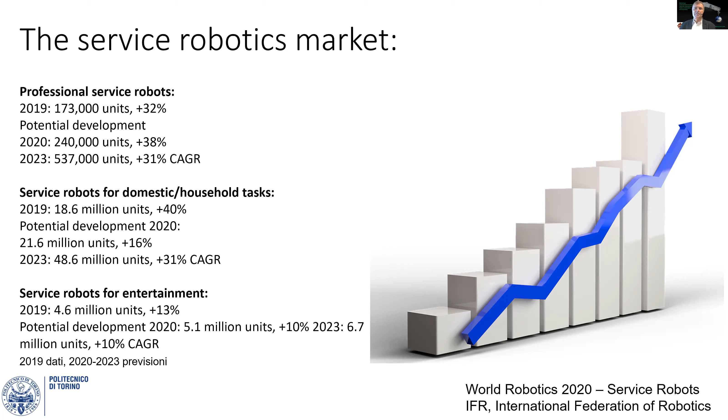The continuous yearly growth that is forecast is around 30%, which is impressive. Where are the professional service robots used? Mainly in logistics and inspection. Those are very important areas that are growing according to the International Federation of Robotics.

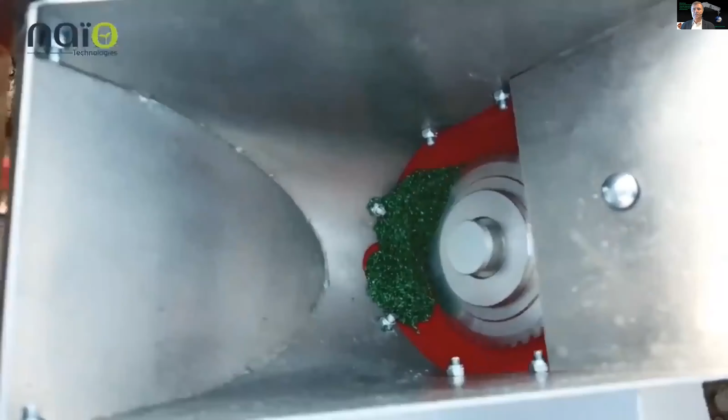But they are also devoted to weeding and hoeing. This small video gives some idea about this small size. Here you can see seeding and then hoeing. Those are the most important activities.

Moving to medium size, we have tools and robots that can move in a farm. They are designed for multiple implements, multi-purpose. For example, the steer tractor has hybrid motorization in order to work 24 hours a day. They are connected in order to be very accurate in positioning, and they must be safe. This solution works in tree crops, market gardening, or viticulture, both with narrow rows or wide rows.

Again, a few seconds of images to have a look at what happens in the field. So the last part of my categories is related to big size.

What I want to underscore is that now we are mainly at a concept stage, so there are no products available in the market, but many big companies are working on solutions that will make autonomous also big size robots devoted to operations that require high power, such as plowing, harrowing, weeding. They have to be compatible with traditional agricultural machinery implements.

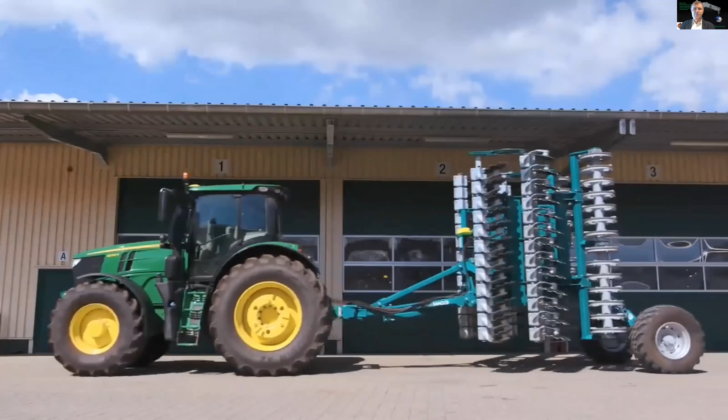To give an idea, again a small video: this is a very interesting solution that substitutes the wheels with tracks, so it is very compact, highly maneuverable, and also the power available is very high. So it is a challenge to have a product like this.

Now I want to move to a research prototype, and show our research on a mobile robot devoted to precision agriculture. Precision agriculture is a crop management technique that employs tools and technologies to increase the climatic and environmental sustainability of agriculture and to increase efficiency and quality.

The rover you are looking at in the image is devoted to mapping, monitoring, and cooperation with drones. I will give you some detail, but I also want to underscore the project requirements related to vineyard activity.

The vineyard has a specific geometry, so the height of the foliage is between 0.5 and 2.5, and the distance is between 1.5 and 2. We also have, for example, hill landscapes and slopes that are very strong.

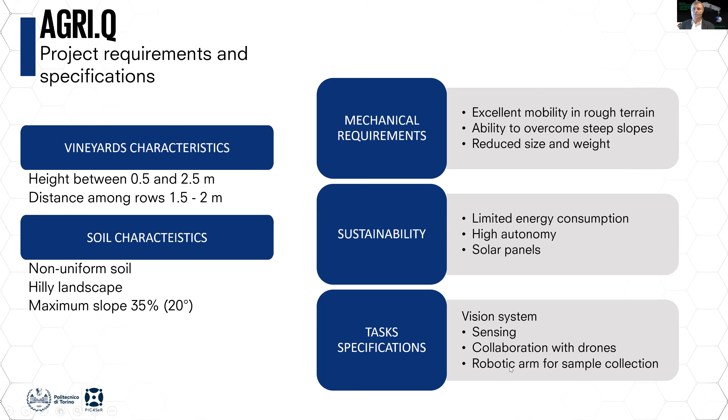This is the system. It is better to see it when it is working. Again, we chose to have a photovoltaic surface on top, but the challenge is to move on ground that is very complex in geometry.

We chose an 8-wheel driven solution that is something in the middle between track and wheel, because the contact surface is very wide, but at the same time we have the efficiency of wheel locomotion.

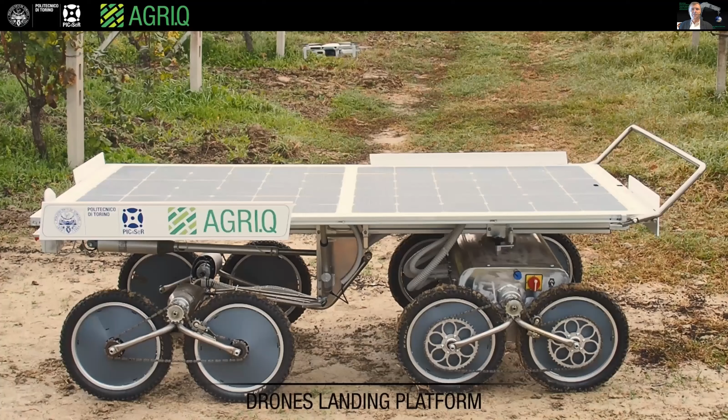The top platform can be used for landing drones, and we also have a collaborative robotic arm installed on the platform. We can have a wider workspace, considering also the workspace of the mobile platform.

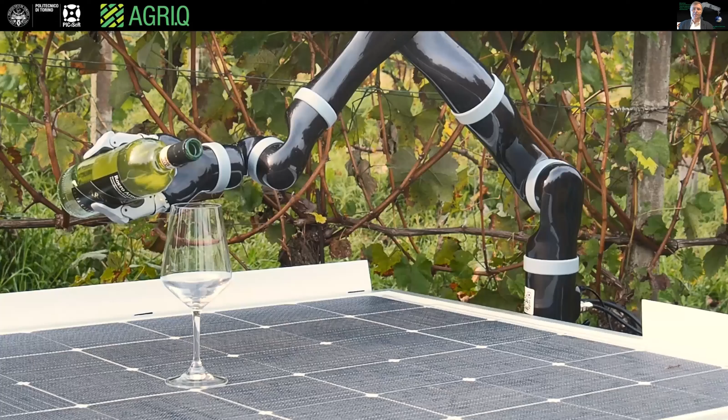So this is shortly our solution, and cheers for the results—have some wine. Okay, a few seconds more, I will skip some detail.

You can have a look at the passive degree of freedom used for steering, because we have differential steering thanks to the speed control of the front locomotion unit. There is a passive degree of freedom for compensation of the unevenness between the front and rear module.

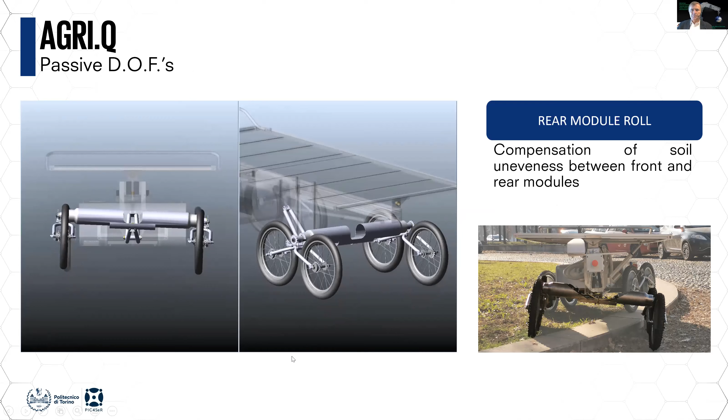This is one of the most interesting characteristics of our mobile robot: it is able to climb obstacles with a dimension close to the radius of the wheel. That is impossible with only one wheel, but this wheel-rocker rotation enables good load distribution on the soil and also climbing ability.

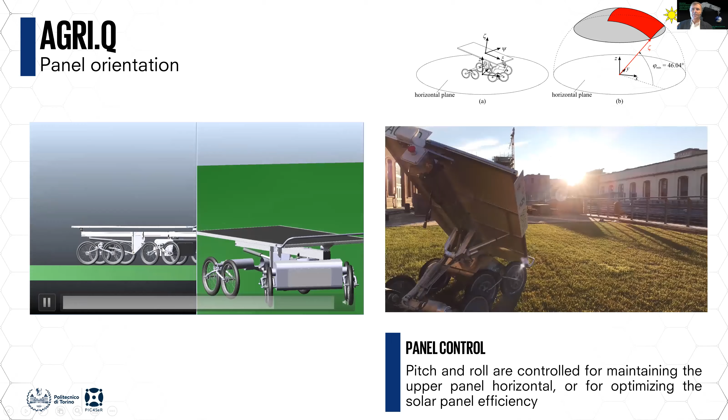Relating to panel control, we have two orientations that can be controlled, both for levelling and for following the trajectory of the sun in order to have a better photovoltaic effect.

I'm sorry, I have to close here, and thanks for your attention. Thank you very much.

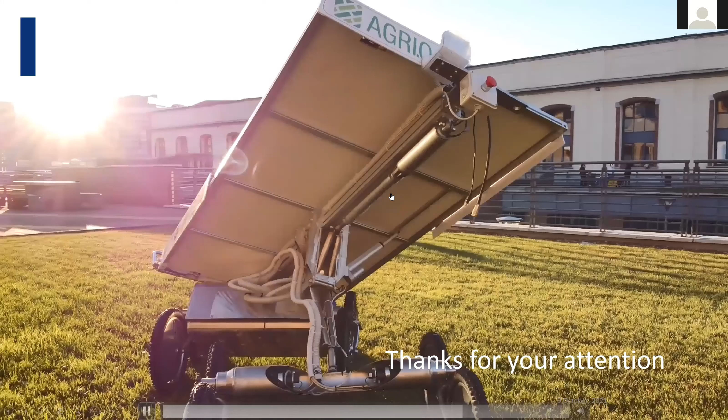There is a question from here in Rome. Okay, please go ahead. Can you hear it? Sorry... No. Okay, I can try to repeat it.

The question was: how can a company use these robots? Are these robots that can be used by a single partner, like a small farm, or does it require a big company? So they are asking if this kind of robot can be used by single farmers on a low scale, or if they are more for big companies that can afford them.

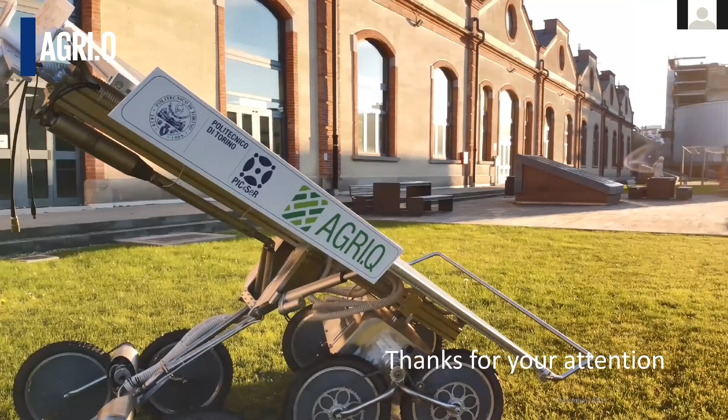No, especially this solution was designed in order to be a low-cost solution. What I mean is that we reduce as much as possible the number of actuation systems. For example, we have an 8-wheel tracked robot, but only 4 motors for traction, 2 motors for orientation of the panel, and in total we have a mass of less than 100 kilos.

That means a simple solution, and obviously now we are at the prototype stage, but we believe this solution can be realized as a product with limited cost. Finally, it is interesting to have this type of application for relatively small farmers who want to control their production.

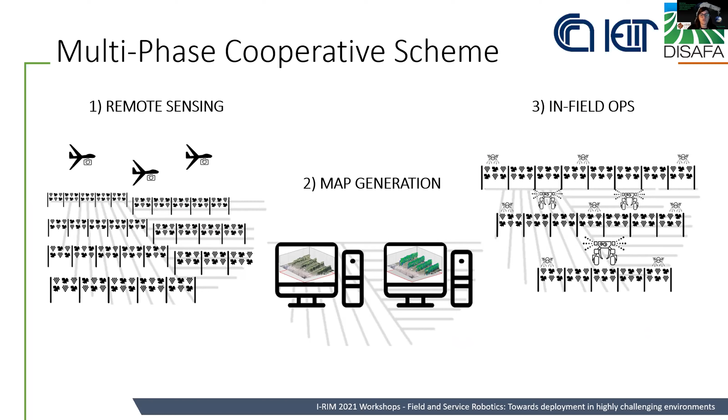These maps still maintain the shape of the crops, providing light maps that can later be used for the autonomous guidance and navigation of both ground and aerial vehicles for in-field operation, in particular spraying of biopesticide within vine rows over slope terrains.

This mission scenario is placed within the PRIN project entitled 'New Technical and Operative Solutions for the Use of Drones in Agriculture 4.0', whose goal is to design new tools and implements for in-field operations performed by unmanned autonomous vehicles. The consortium includes other universities from different parts of Italy.

About the main actors: in this operative scenario, we are considering a mini fixed-wing UAV for the remote sensing mission phase, a 4-wheel steering electric UGV developed by Professor Gay's group for the in-field operation, and the Q4T quadrotor developed by MAVTech Company for the spraying operation among the vine rows. We selected the Nebbiolo vineyard in Serralunga d'Alba, which has an extension of 2.5 hectares and an elevation ranging between 330 and 420 meters.

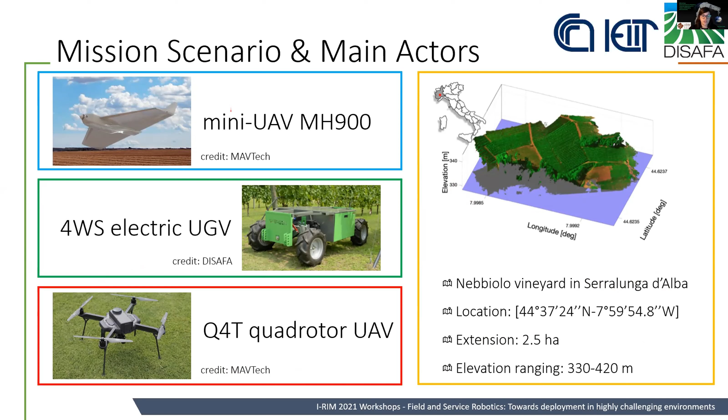Going into detail of the multi-phase approach: the first phase is the use of a fleet, or a single unit depending on the extension of the area, of a fixed-wing UAV that overflies the selected vineyards in order to collect aerial imagery for reconstructing maps of the area.

In this case, we developed a guidance and control algorithm to guarantee proper autonomous navigation and guidance of these drones. In particular, we use waypoint-based and terrain-following guidance to define the optimal path, and we ensure robustness to wind gusts using the so-called tube-based robust model predictive control to track the optimal trajectory.

Once all the aerial images have been collected, we developed, in collaboration with the Department of Agricultural Sciences, an algorithm that allows us to automate the elaboration of those images into georeferenced maps, though these maps are simplified.

To do so, we first perform a semantic interpretation of the point cloud in order to identify the different elements of the scenario, such as the canopies and the terrain. Then we adopt a combination of convex hull filtration and minimum surface area design in order to generate a light 3D mesh model of the crop, as shown in these pictures, which can later be used for guidance and navigation of the in-field drones.

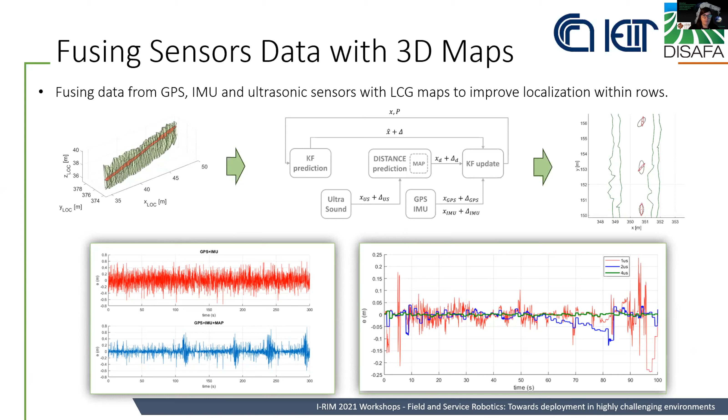Another way to use those maps has been to automatically define, using an unsupervised method, the so-called occupancy grid map, in order to identify the obstacles - in this case static obstacles represented by the vine rows - as well as the turning area, which defines the requirements and the constraints for planning the in-field operations of both ground and aerial vehicles.

These maps are later used for the design of the ad hoc guidance strategies for the UGV and the quadrotor. For the in-field operation, we consider as the ground vehicle a four-wheel steering UGV. For the guidance and control strategies, we use the classical approach based on a global path planner, which in this case is based on an RRT-star approach that provides us all the main waypoints along the field.

Then we have the local path planner based on a dynamic window approach that provides us the feasible optimal trajectory, enforcing the non-holonomic constraints of the vehicle. Once we obtain offline the desired trajectory, we have for the UGV a cascade control strategy based on a proportional steering controller, which is proportional in terms of the distance and orientation relative to the attitude of the vehicle, and has non-linear features with respect to steering angles of the front and rear wheels.

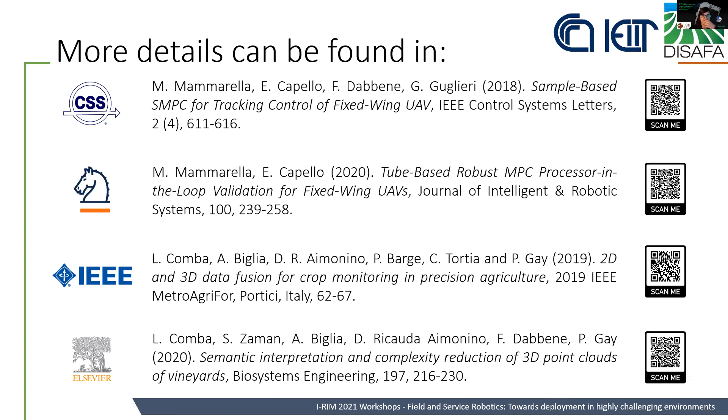More details about the work that I described to you this morning can be found in the publications reported in these slides. And from my side, that's all. Thank you for your attention, and if you have any questions, I'm glad to reply.

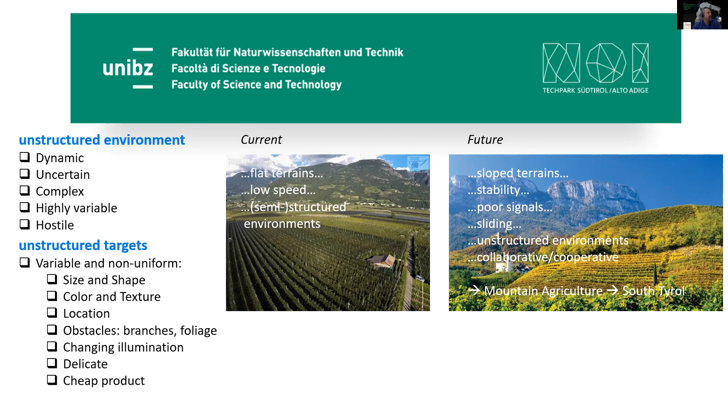The lab's main mission is to be a link between applied research in mechatronics and industrial automation with agroforestry. I'll move on to the sorts of systems we're working with now.

At the moment we effectively have 3 main ground vehicles that we use. We use a Husky unmanned ground vehicle, a 4-wheel system, outfitted with a couple of different robotic arms, a UR5 and a UR3. I'll explain a couple of the projects we're running with this system.

We've also developed a couple of our own systems. One example is a 1 meter long remote control scale model that we've instrumented with sensors such as RTK GPS, inertial measurement units, and things like this, to build our own vehicle for initial testing in this environment.

We also have a tracked vehicle called the Matrobach, made in Austria, with a payload of about 500 kilograms, and it's actually quite fast. We've also just started experimenting with legged robots, especially in environments like this one which are very uneven and steep. There are some advantages to using legged systems, and we've only just started working with this vehicle, so it's new to us.

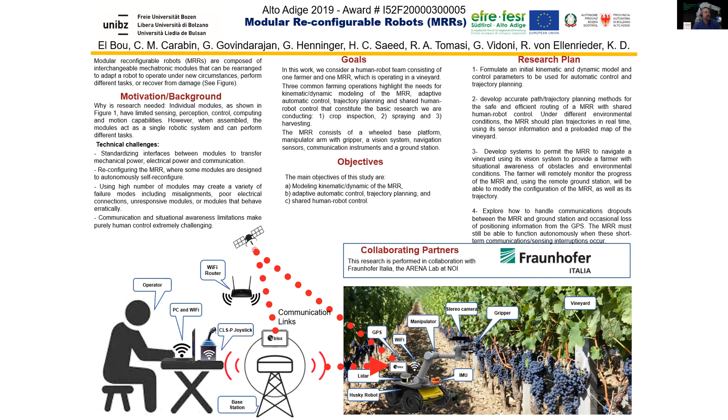This is an example of some recent experiments. These are all indoor experiments because we've only just started this project, but we've been looking at path planning with obstacle avoidance. One of the researchers working with us had been developing path planning methods using boundary node and path enhancement methods, combined with online path optimization for obstacle avoidance.

In these experiments, the vehicle is moving around an environment, which in this case is a simulated vineyard with tapes marking the rows of vines. The idea is that you can put an obstacle in the path of the vehicle. In this case, the obstacle is only seen virtually, so the vehicle doesn't currently have the sensors on it, but it already has the capability to replan the path in real time to avoid the obstacle. You can see the sequence where the robot approaches it, backs up, and goes around the other side.

One of the other things we believe is going to be fairly important for the widespread use of robotics in agricultural applications is semi-automatic control, where you have mixed control input coming from both a human and from the automatic control system itself.

These are some experiments we did with that small dune buggy I mentioned earlier. The vehicle is outfitted with GPS sensors, its own automatic controller, and an RF modem to communicate with a base station, where a user can use a force reflecting joystick to provide input. We're using what's known in robotics as a mixed initiative approach, where the signal from the human and the automatic controller are mixed.

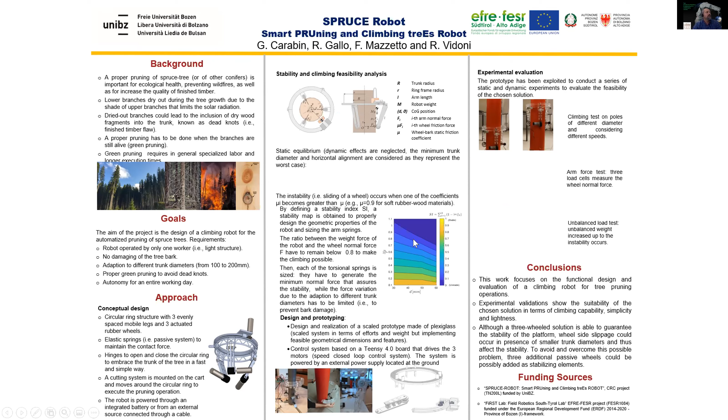Lastly, in mountain regions, monitoring lakes and similar features in remote areas is a bit difficult, but it's also very important from an ecological standpoint.

Here in the mountains, this is often, from an ecological standpoint, a very important measurement. Often people have to do this in remote areas, so making something you can carry on foot and use to make the measurements is something we've been looking at.

So that's it for my talk. I'm happy to answer any questions if anyone has them.

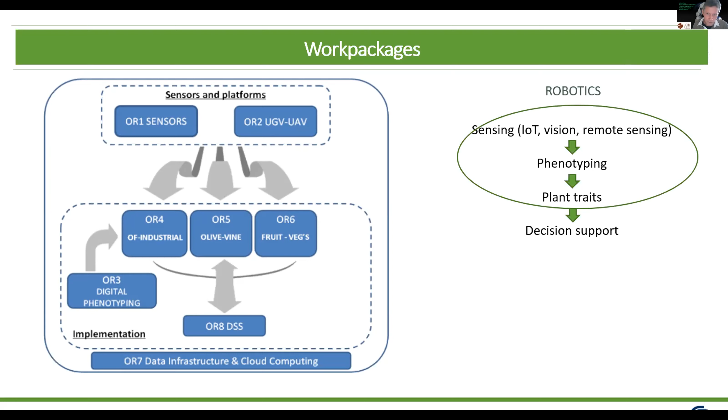We are developing a number of sensors and technologies that go from IoT networks to optical gas sensing and in vivo sensors or computer vision sensors. And then we are developing rovers and drones specifically for the applications of the project.

This is a phenotyping platform, and here is how it works. This is basically a robotics platform, but it's a well-established industrial plant—this is the Italian node of Emphasis, which is a European infrastructure on plant phenotyping. What we do here is create a controlled environment, creating the link between plant phenotypes and digital representations, which can be images or spectral signatures.

In this platform we generate stress conditions on different genotypes, in this case of tomato, where all the plants are individually monitored and moved along, then go into rooms with computer vision cameras. Plus we added hyperspectral cameras, so we can take digital representations of each plant and extract the information we need to derive plant traits—a trait can be a characteristic like yield, leaf area, chlorophyll content, and so on.

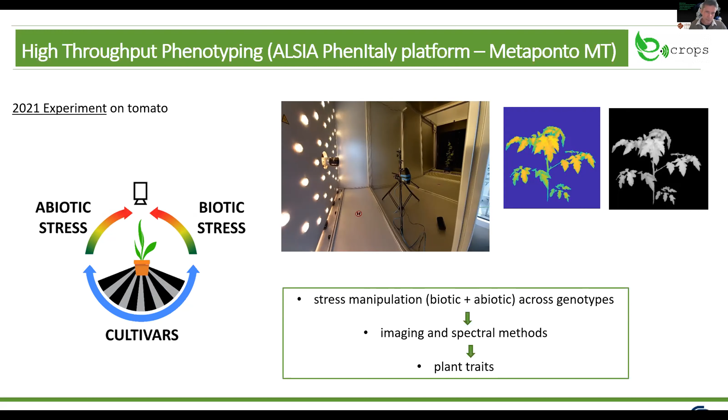Then what we are doing is putting all this into a field environment. In Sardinia, at a Bonifiche Ferraresi farm of about 1,000 hectares, we are organizing an experiment that will happen this year, in the 2022 season, putting a number of plots and replicates, generating stress and different fertilization rates, and monitoring them with ground robots and UAVs, using technologies from computer vision to hyperspectral remote sensing.

We put an effort into hyperspectral technology because many of the participants have this background. So we have hyperspectral cameras on board the drones, and a link with a hyperspectral satellite mission, Prisma, led by the Italian Space Agency, with the aim to upscale. What we learn and develop in the link between plants and remote sensing data, we try to upscale with satellites to a larger scale, fitting a company scale, since not every company can be monitored entirely with robotic platforms or drones.

Then we have other pilots going on, which involve robotics. In this phase, we are developing the protocols, so we sample the plants manually, and on the other hand, the robot platforms are being developed.

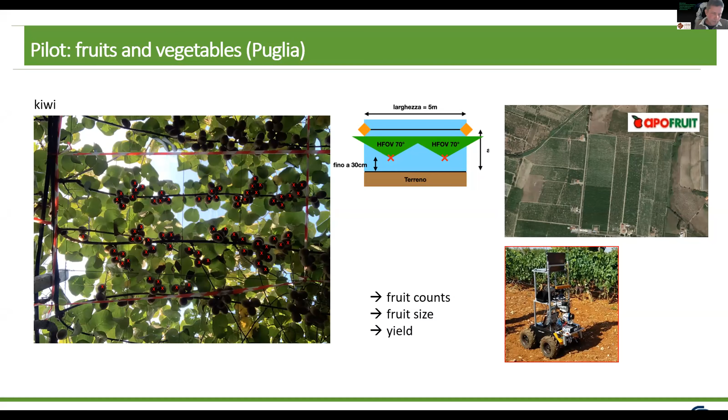So I'm done. The project is in the initial phase, so I don't have final results to report. You can find more information on this website. You can reach me at this email, and we hope to have more results maybe next year.

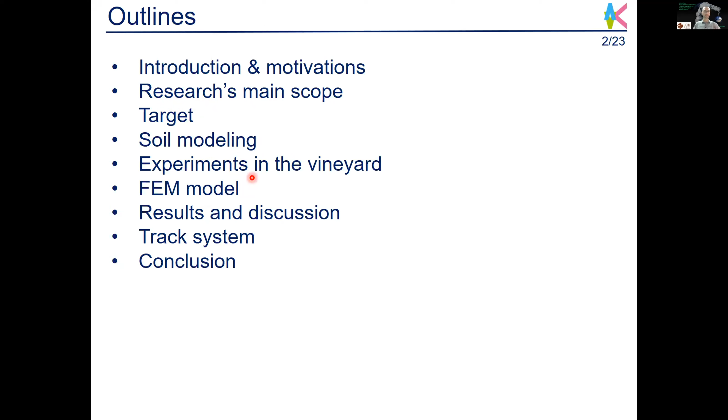Good morning, everyone. I'm Enrico Di Maria from Kyushu Institute of Technology. First of all, I would like to thank the organizers and especially Professor Giulio Reina for the chance to talk here today. My presentation is comparing FEM and experimental data to predict rolling resistance in a grape transporting vehicle. At first, I want to give an introduction and explain the main motivation of the research before going to the real target of this talk, and so talking about soil modeling, experiments in the vineyard, our model, and results and discussion.

Okay, so can you see the title? Yes, yes, oh okay, okay. So as you probably know, Italy is one of the main producers of wine, and in 2019 it was the main producer, so this is an important sector for our agriculture. Usually the traditional way to harvest grapes in a vineyard is that some workers collect the grape and put it in this basket. Then a tractor with a cart enters into the field to collect the grape, and finally he is going to fill the main truck outside the field.

Since the harvesting period is usually August or September, and we have some rain, some heavy rain, it's possible that when we must collect the grape, the field is not in a good condition. So having this tractor entering the field can cause huge damage.

As we know, the soil is a porous medium consisting of particles, and we have two types of damage when the vehicle passes. The first is called soil compaction: when the vehicle passes, these pores are compacted, causing a volume change. This is detrimental for the soil because water cannot infiltrate and roots cannot grow.

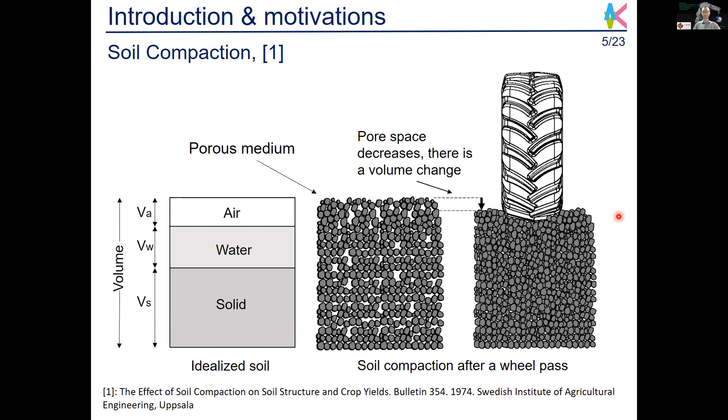The second mechanism of damage is soil distortion. This is especially important for running gears that have a longer contact patch, for example a track system, because the particles are taken from the beginning and then displaced along the whole length. So this is the second mechanism of soil damage.

And so the result is that we can see these ruts in the field, and the farmers must restore the soil quality, and this represents a cost. So the main scope of the research is that we are thinking about developing a system that can adjust the contact area based on the soil condition and also on the payload. It can go from half-tracked mode to a wheeled mode, reducing the area in the second case.

Besides the damage to the soil, this is of course going to change also the performance. Usually on soft soil, the track can perform better, while on hard soil the performance becomes more comparable, especially on frictional soil. But the wheel mode is more efficient - the steering is more efficient if we use steerable wheels.

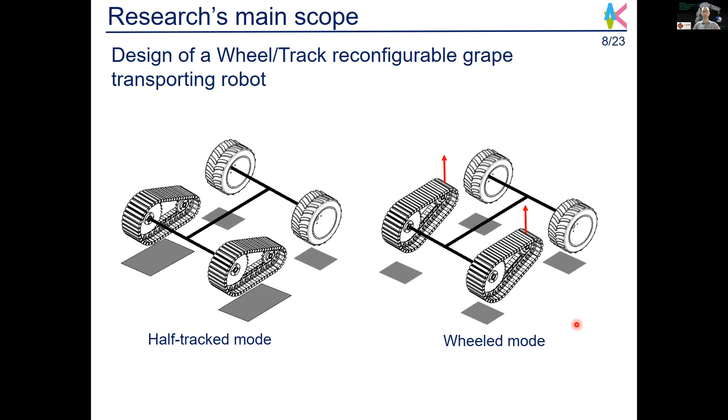And so eventually the final image is that we should have some autonomous cars working alongside with humans in the field. And based, for example, on some soil moisture information, and also the current drawn from the motors, which is roughly proportional to the rolling resistance, the vehicle should decide which locomotion system is best for that condition.

So we go to the target of today. Today what I'm going to do is talk about a FEM model that we developed to analyze rolling resistance and rut formation. This is to support the design of this prototype. I will also show briefly some experiments we carried out in the field to investigate the mechanical soil properties, and finally we will evaluate the impact that different running gear sizes have.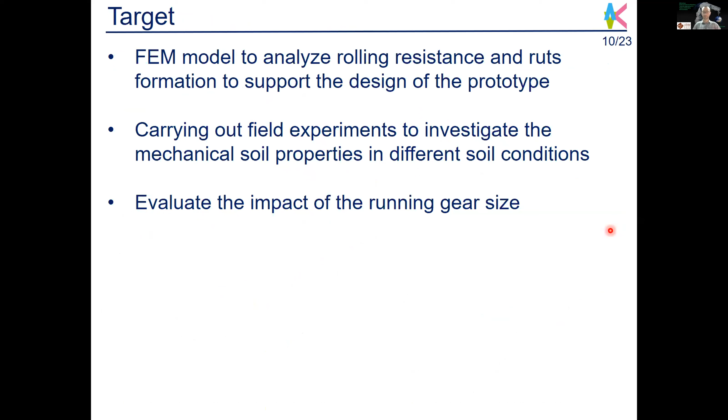I'm going to focus on the wheel type, which is the simpler case. But I want to mention that this analysis belongs to a broader context of experiments that includes also the track. At the end of the presentation, I will say just briefly something about the track as well.

So we consider as targets firm soil, soft soil, and wet soil. To model the soil, we need first to define a yield surface - a boundary between the elastic region and the plastic region, because the soil is an elastoplastic material. The Drucker-Prager model is often used for modeling soil because there is a dependence on the hydrostatic stress.

But we also use the von Mises model, which is this cylinder, and usually von Mises is used for steel. The Drucker-Prager model is apt for firm soil and soft loose soil, where we have volume change, while for wet soil we basically have distortion, so for this we prefer the von Mises model.

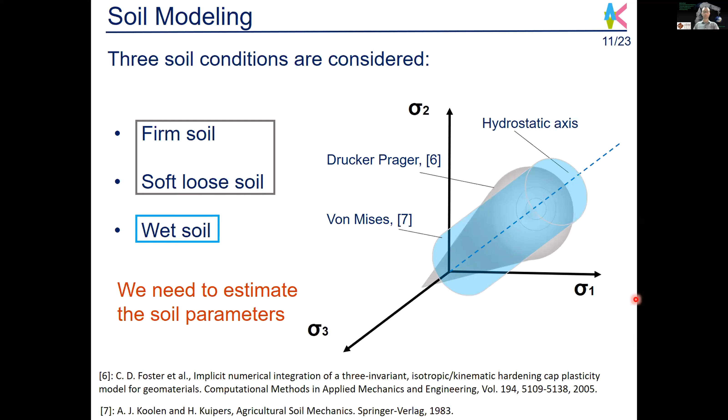So to characterize these surfaces, we need to estimate some soil parameters, and for doing that we carried out two kinds of experiments in the field. One is the penetration test, to estimate the elastic, frictional, and cohesive properties. The other test is the pull test, to have a comparison with the FEM simulation - this measures the rolling resistance and the sinkage.

We marked a series of points where we carried out measurements with the cone penetrometers. Finally, based on these results, we can try to estimate the elastic and plastic properties. There are some relations that I don't show here.

Then we carried out the pull test. We developed this frame that we attach behind the tractor. There's a steel cable with a force gauge connected to this portion of the cart, so the cart can slide and is pulled by this steel cable. Then we can adjust the weight with these cast iron discs. We used two sets of weights, 50 kilograms and 80 kilograms.

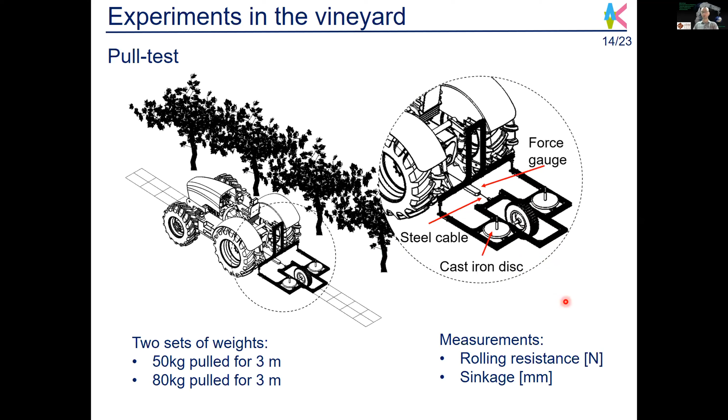We used an airless tire because we want this wheel to act as a rigid wheel, since we are interested in the deformation of the soil. With this experiment, we measure the rolling resistance and the sinkage. After the wheel pass, using the gauge caliper, we measure the sinkage in the field.

Finally, we considered the range of diameter and width we wanted to investigate based on our image of the final prototype, and we assumed a final weight of 400 kilograms, including the payload, so including the grape. We assumed this weight to be uniformly distributed, so 100 kilograms for each wheel.

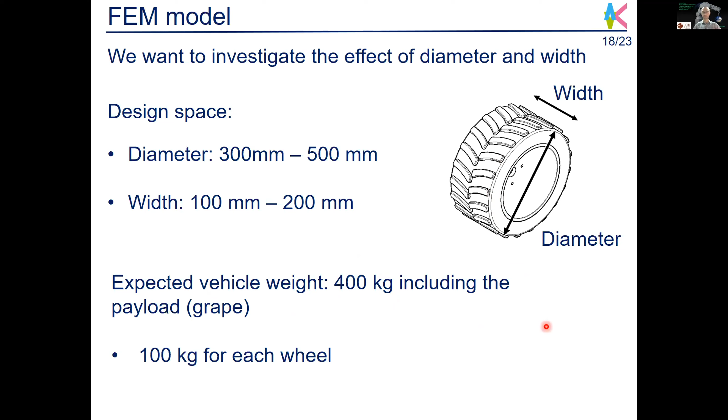A possible explanation is that since rolling resistance depends on the volume of soil deformed, if we increase the width, it's true that sinkage decreases, but at the same time the area of soil engaged with the wheel and deformed is larger. That's probably why we get this result.

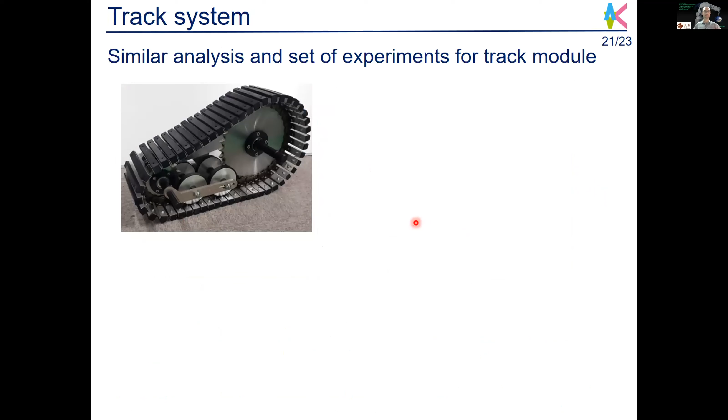As I said, I'll give just brief information about the track module, since we also carried out some experiments related to the track. In our laboratory we developed this track and connected it to a frame similar to the one we saw for the vineyard in Italy. Because of the pandemic we couldn't go carry out experiments in Italy, so we built our own facility, mixing the main components of soil: clay, sand, and silt, to get as close as possible to an agricultural soil.

Then with a compactor machine we adjusted the strength, and carried out the analysis again. You can see on the left that this track model is quite simple, very simplified. The reason we started with this simple system is because modeling the track, especially in a 2D FEM model, is quite difficult, and it must also be parametric, so this dimension must change.

So we started with this, but you can see the pressure bulbs are too uniform. With this model we somehow underestimated the real pressure, and the rolling resistance and sinkage were underestimated compared to the experimental results. So now we implemented a multi-body model with a flexible chain, and now we can correctly see the peaks of stress under the track. But here now we have a simplified soil.

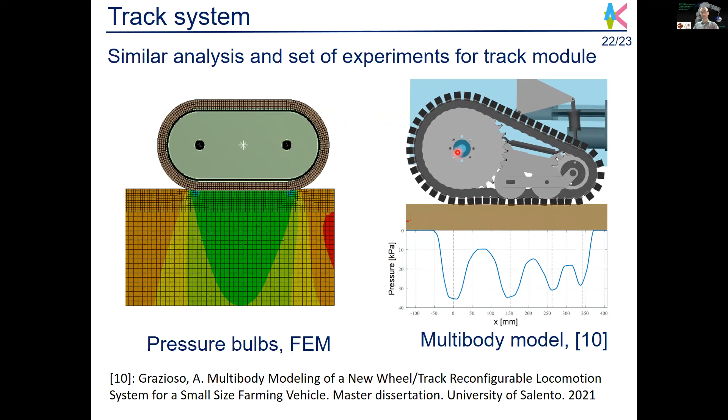This is an elastic soil. So the next step should be to have a synthesis of these two models and complete the analysis of the track that is still ongoing, basically.

In conclusion, in this talk I introduced the concept of a reconfigurable locomotion system, and showed how we carried out experiments in the vineyard to investigate the soil properties to tune the FEM model. Finally, we carried out an analysis to evaluate the impact that diameter and width of a wheel have on ruts formation, rolling resistance, and power loss. Thank you for your attention.

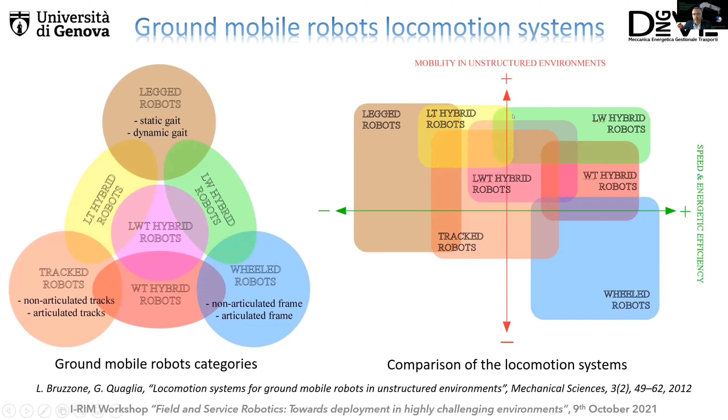This presentation is about a hybrid locomotion system for small-scale ground mobile robots. If we try to put in a qualitative way in a plane where the horizontal axis is speed and energetic efficiency, and the vertical axis is mobility in unstructured environments, we can place the main locomotion systems: legs, tracks, and wheels, with 4 possible hybrid combinations. Legged robots are in this zone of the plane, wheeled robots are in this zone, and track robots are somewhere in the middle. If we want to reach the good zone of the plane where we can conjugate mobility, speed, and energetic efficiency, we can use hybrid locomotion systems.

If we consider medium or large scale ground mobile robots, legged locomotion is probably the most performing solution, but high-end legged robots with dynamic gait are very costly and very complex to control. So in the case of smaller robots, where inertial forces are less relevant and it's possible to accept higher motion discontinuities, it is possible to adopt simplified hybrid architectures, for example rotating legs, or to conjugate legs, wheels, and tracks.

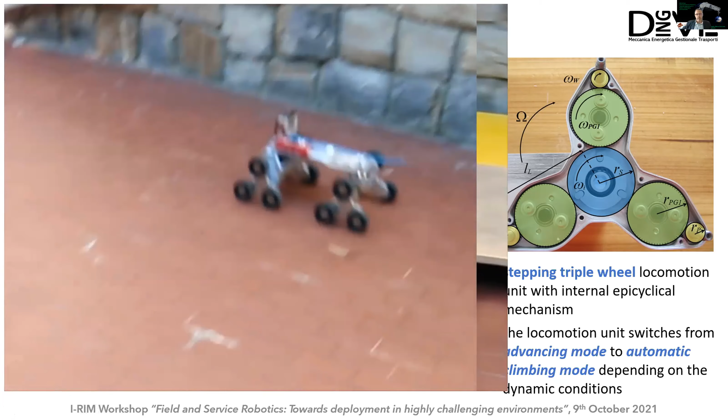This is a video about the Epi.q robots, which are based on the stepping triple wheel locomotion unit. This locomotion unit can switch from wheeled locomotion to legged locomotion, rotating the triangular locomotion system on the basis of the dynamic condition, because its mechanism is based on an epicyclical mechanism.

So this robot, for example, has only 2 motors, because it has only the front wheel which are actuated. But it is possible to use also more complex configurations. For example, these 2 are with front wheel drive, then only 2 motors.

In this case, there are 4 motors because all the locomotion systems are actuated, while in the front wheel drive configuration the rear carriage is idle. But it is also possible to complicate the architecture of the Epi.q family using a modular approach.

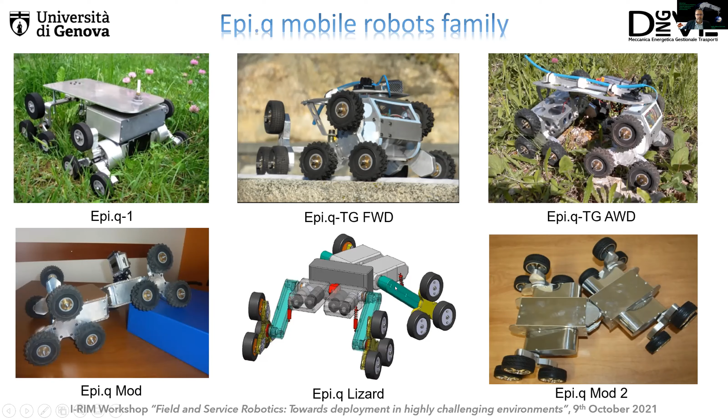In this case, the locomotion unit can be placed on top of some legs. In this case, they are passively suspended. In this case, they are actuated.

Mantis uses a different approach. It has actuated wheels with differential steering and two legs which are inspired by the praying mantis leg shape. The legs are used only in case of obstacles, steps in ascent or descent, or uneven terrains.

We used a non-dimensional analytical approach to study the influence of the main geometrical parameters, but also multi-body simulation. Multi-body simulation has been used mainly to do the synthesis of the leg motion law for step climbing.

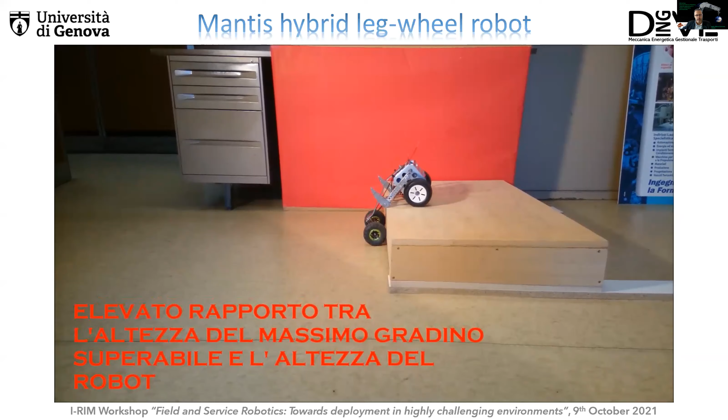It is also very maneuverable in narrow spaces, and it can restart from any position, because after a capsize, it can use its legs to start moving again.

WheTLHLoc is a wheel, track, leg hybrid locomotion robot. It has two actuated tracks with differential steering for tracked locomotion, but it also has two legs actuated independently and two wheels actuated independently. On one side, there are also two omni-wheels.

The robot is fully symmetric with respect to the XY plane, so it can be used in this way. On wheel locomotion, it is suspended on the two wheels and on the omni-wheel.

So it is fast and with low energy consumption. It is also in a position where the field of view of the front camera is good, because it points up.

If we lift up the legs, it is a normal tracked robot. If there are obstacles, it can use also the legs and the wheels to cross the obstacles, for example on stairs. In this case, the omni-wheels are on the front, so the contact is on the track, on the rear part.

In this slide, we can see the multi-body simulation used to synthesize the leg motion, the combined motion of legs, wheels, and tracks to overcome a stair.

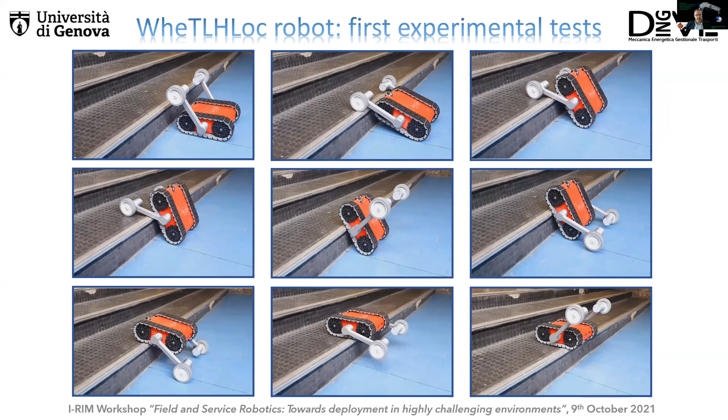We are in the phase of prototyping, and here we can see the first experimental tests on stair climbing. The first experimental tests are successful, and this is very good news that we have achieved in the last days.

Snake Track is the last robot that I will present. It is a bio-inspired single-track mobile robot with a compliant vertebral column. It is designed for surveillance and inspection in narrow spaces. It is a single track, so it can steer by bending the vertebral column.

The bending is commanded by motors which are connected to a wire. There are 2 wires on the 2 sides of the robot, and in this way we use 2 motors placed at the modules to steer, and the other 2 motors are placed at the ends to move the track, moving the drive sprockets. The cameras are placed on the front of the robot because there are holes on the tracks.

It is not a continuously updated view, but it is useful to guide the robot and to perform surveillance tasks. Due to the holes, we can put cameras also on the top of the track, if required. But this work is in progress.

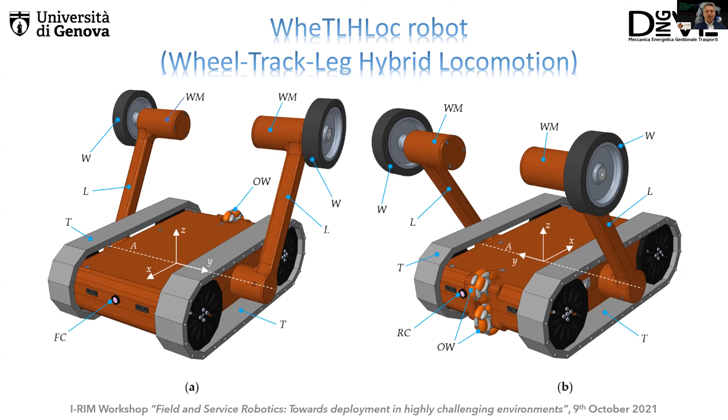Let me just add something, because it's interesting to see that you have a reconfigurable robot very similar to the one shown by Enrico before. So it's nice to see that in different parts of the world you had the same idea of having a robot that can work with wheels or with a track. Just this consideration, thank you very much.

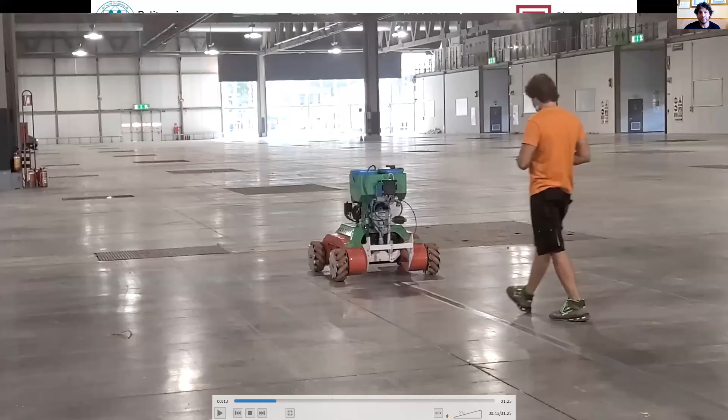Okay, so the robot is moving inside the pavilion. As you can see, it's tracing gray paint over the ground.

During this test, the robot is teleoperated because it was just a test to see how the paint lands over the ground. Also, by using the mecanum wheels, the robot is able to steer over a very flat surface without slipping effects.

So, coming back to the presentation, I have other videos, but I think we are running low on time, so I'll skip them.

This material is very similar to sawdust, the material left after wooden production. The bulk density in this case is defined as the maximum number of flax shives divided by the total volume they can occupy inside the truck container.

So this is the container, this is the material, and we have a mechanical hopper placed at the top of the container with a screw feeder that makes the material fall down.

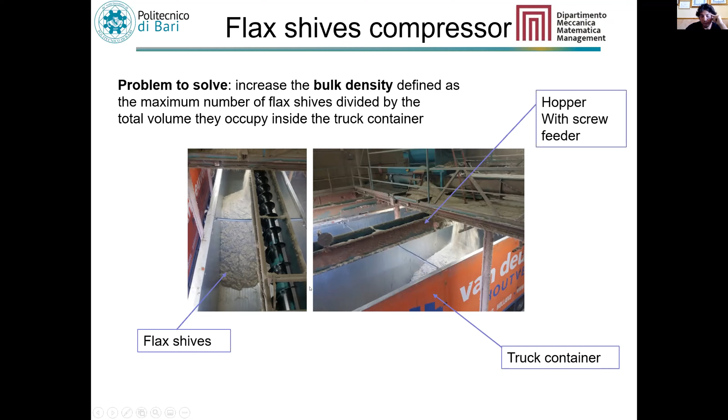To solve this problem, we designed this really heavy machine with wide tracks. Each belt is about 80 centimeters wide. And this is a picture of the robot in action.

As you can see, we have the material falling down from the mechanical hopper and the robot rolling over it. On the right picture, we have the result - as you can see, the material is all compressed.

And I try to show you the video. Same problem. Try with just the combination of Alt and Tab. Yeah, I guess okay.

Now you see, okay. So the material is falling down, the robot is rolling over it, compressing it. This is the first layer.

Basically what the robot does is float over the material. It's for this reason that we designed these wide tracks.

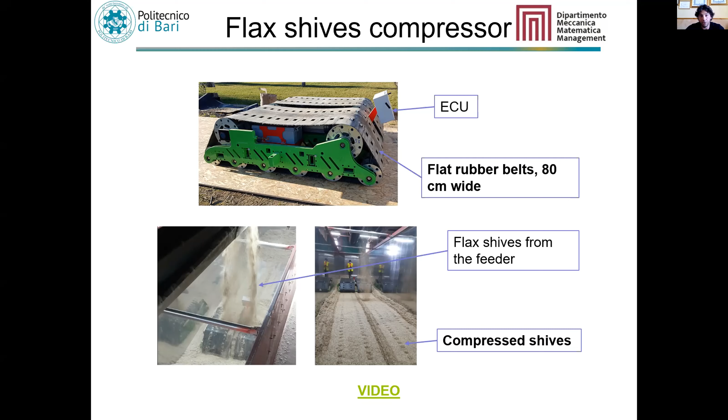At the same time, the robot has to avoid putting too much pressure on the fiber of the material in order to avoid destroying it.

If this happens, the locomotion system can be blocked, so it's very important to keep the belt always tightened. The same happens when the obstacle is at the bottom of the belt - in this case, wheel C and wheel B move in order to keep the belt always tightened.

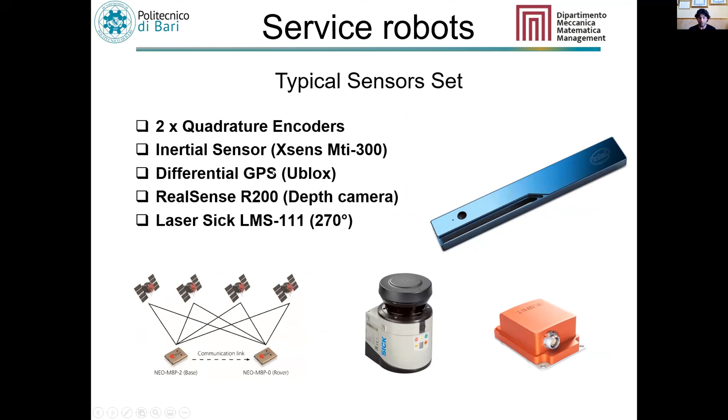All this communication is made with a main node, which is able to elaborate all this data and perform high-level applications. Typical sensor set can include encoders, inertial sensors, GPS, usually RTK GPS for accurate positioning, and depth cameras and laser sensors for obstacle detection.

Speaking about the software, we always run on ROS, and we have a main node able to communicate with lower level routines, usually used to control the motors or to communicate with encoders or sensors and so on.

Also our main node is able to communicate with another level of software routines, able to keep the output from inertial sensors, lasers, and RTK GPS.

By combining the output of all these sensors, we are able to improve the positioning of our platform in the field. And by using the camera, we are also able to run a three-dimensional mapping and also the terrain classification.

As a result, we can see here a vineyard reconstruction while the robot was moving along this vineyard row. We were able to put a label on the building map, and as you can see, the robot starts facing the soft terrain, then encounters a flat surface, a plowed one.

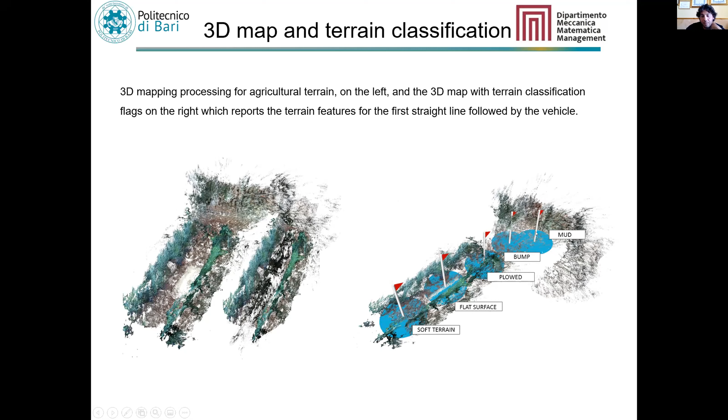Then here there is a little bump detected by using the inertial sensors, and then mud. All these labels were put in during an online classification algorithm.

So I'm done. Thank you for your attention.

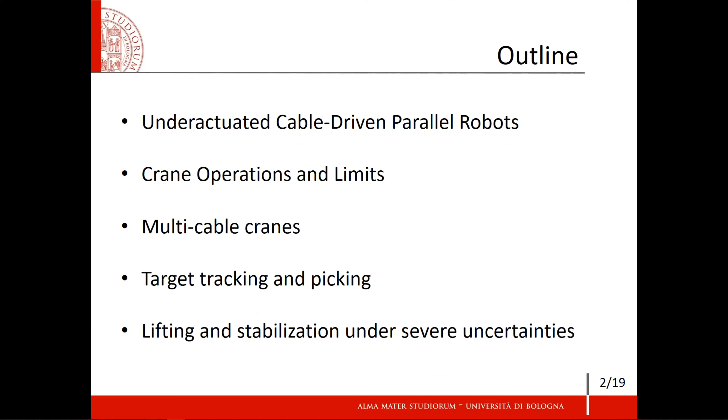After a brief introduction to what a cable robot is, and specifically an under-actuated cable robot, I'll briefly recap usual crane operations and their main limitations, and show how an under-actuated cable-driven robot can be envisioned as a multi-cable crane. Then I'll show some of our latest simulation results for achieving crane-like operation and thus limiting standard crane shortcomings.

Cable robots are parallel manipulators that use cables to manipulate an end effector in space instead of rigid links. Among their main advantages, they are easily reconfigurable by just changing the cable exit point, and their workspace can be scaled up to several cubic meters.

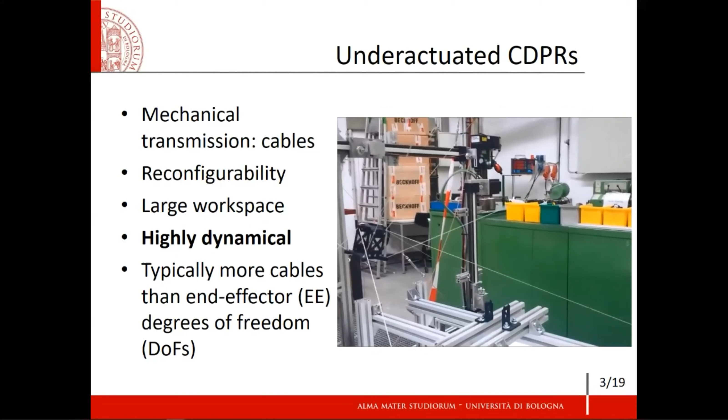They can also achieve considerable speed and acceleration, and do very dynamic motions since cables are practically negligible in mass.

On the other hand, since cables can only pull and not push, there are usually more cables than the end effector degrees of freedom, since this allows better control of the platform.

An under-actuated cable robot instead employs fewer cables than the end effector degrees of freedom it controls, and relies on gravity to maintain cables taut. Its design is thus mechanically simplified with respect to cable robots that have cables all around the platform.

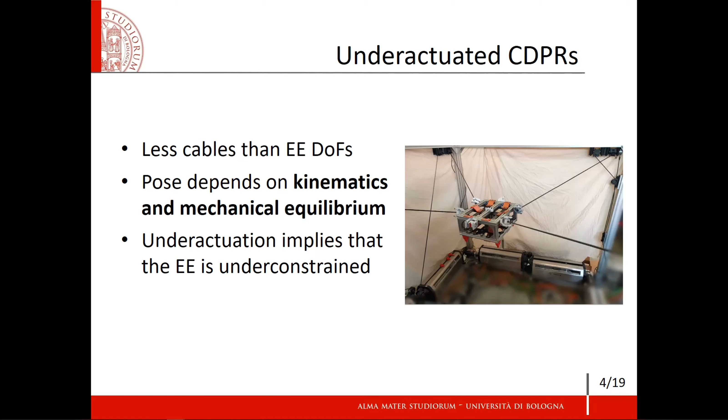And workspace accessibility is enhanced. On the other hand, fewer cables also means less controllability of the end effector, whose pose depends on both kinematic relations imposed by the cables on the platform, but also on the mechanical equilibrium of the platform. In addition, fewer cables also mean less constraint ability.

Thus, arbitrary forces may excite large arbitrary motion if applied on the end effector. End effector oscillation may be limited in real time if we use, for example, feed-forward control approaches, such as input shaping.

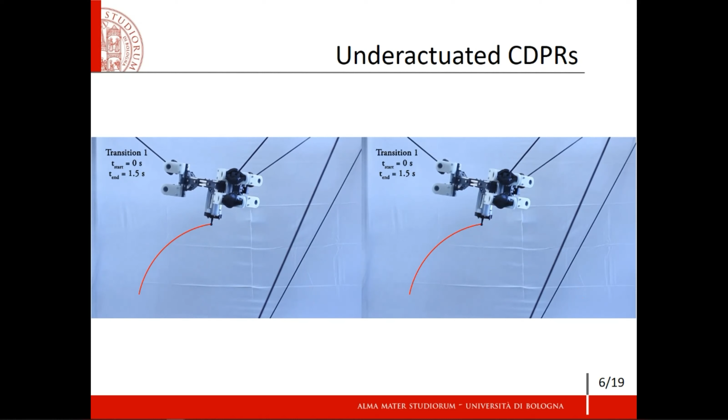Or they can even be completely eliminated if uncertainties are limited and special trajectory planners are used, such as rest-to-rest planners, as in these videos.

So how can we use a cable robot as a crane? Basically, cranes are the simplest cable robot you can envision. They have just one simple cable, which is used to lift vertically a heavy payload.

Secondarily, by using other kinds of actuators, depending on the type of crane you're using, this payload which is lifted can also be displaced horizontally.

One of the principal limitations of cranes is the fact that the lifted payload may swing due to several factors. Crane operators are in charge of the safe manipulation of the payload, and if they are having a bad day, things can go sideways very easily.

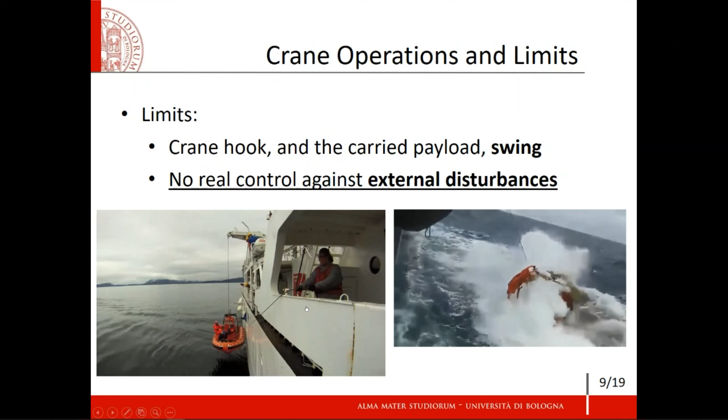Sorry for the noise. If the crane cable exit point is moved, for example in a displacement operation, or as in this video, if the crane is mounted on a ship, there is practically no chance that the operator can react in real time and compensate for this kind of disturbance.

And this is the harsh environment we are envisioning our cable robot to operate in.

In collaboration with a company based in Bologna named Calzoni, we are investigating if an under-actuated cable robot can be used for automatic handling operations from the side of a ship under mild sea conditions, such as sea state 4.

The cable-driven robot acts as a multiple, fast and coordinated crane, concurring on the manipulation of the payload. This new kind of multiple crane can dynamically capture, for example, the payload while it floats on the sea level, and avoid or drastically limit payload oscillation during lifting operations.

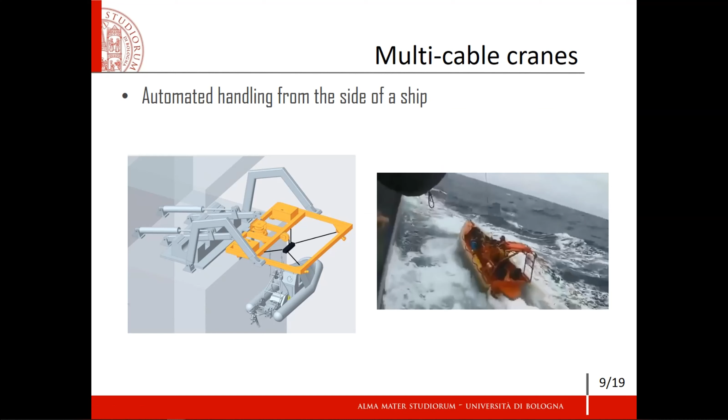The dynamic capture of the payload requires that the hook mounted on the robot platform follows a target in space, which is sampled in real time thanks to specialized sensory apparatus.

In addition, the use of more than one cable may consistently limit unknown payload swings during lifting operations, even if the payload is completely unknown in mass, shape, and inertia, which may be well worth the cable robot's additional cost.

We'll now have an overview of some operations, starting from the most simple ideal case. We want to track a fixed target with the help of the robot. The cable robot is first deployed, then approaches the target, and when sufficiently stable, performs a picking operation.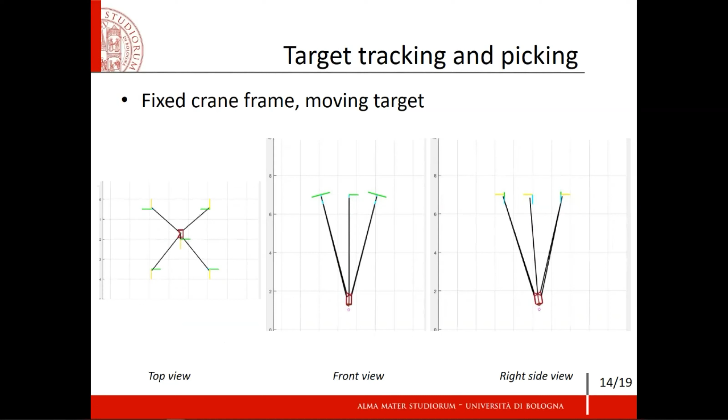If we complicate the scenario and the target is moving, the stabilizing effects of the cable robot are very effective. Despite the hook swinging, the target can still be picked.

More drastically, and also realistically, if the crane frame is moving, the cable robot is able to compensate for it. On one hand, the cable robot stabilizes its own hook swinging induced by the frame motion. On the other hand, the robot keeps tracking the target and successfully picks it. Of course, it needs to stabilize itself, so it takes a little bit longer.

We'll now show some results concerning swing stabilization after a completely unknown payload is picked. Payload swings are significantly contained and lifting cable swinging is eliminated. Of course, the more power the robot has, the more consistent the stabilization will be.

This feature works the same way even if the crane frame is moving. On the contrary, frame motion excites even more dangerous oscillation with a single lifting cable.

We tested that this strategy is even more effective if the actual payload takeoff from the sea level is considered. In this example, we assume that the payload is floating on water and stabilize its lifting, as in a sea recovery operation, which is the application we are actually studying.

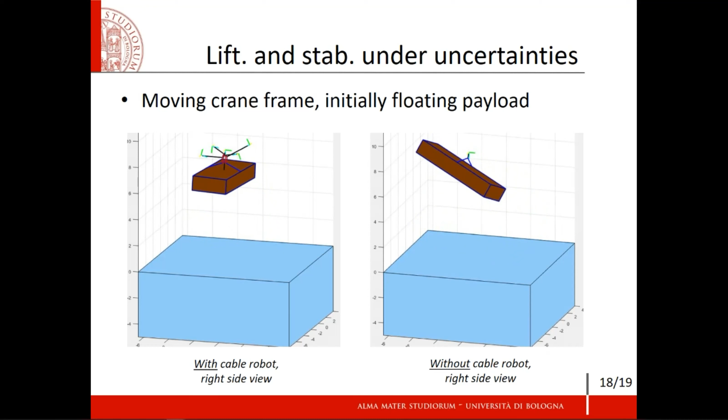So in conclusion, we showed how an under-actuated cable robot can be used as a safer and stabler crane, theoretically. In order to do so in practice, we are currently working on precise hook and frame motion estimation, and we'll conduct some field experiments soon.

Thank you very much for your attention.

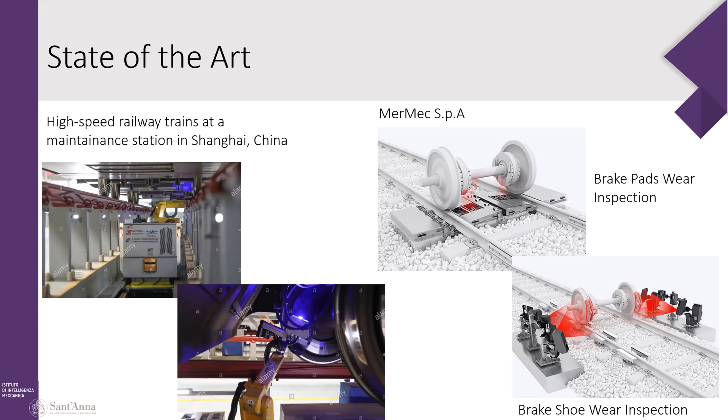So to increase the number of monitored trains, the number of train portions, and also the frequency of inspection, a platform is needed that can work on normal tracks. We proposed a mobile robot whose rolling system and folding robotic arm design allow operation on an ordinary railway track.

The proposed robot was designed to move on the tiny free space left between the train wheels, the railway tracks on the side, and the ground.

This robot is mainly composed of the mobile platform, the robotic arm, and the controller. The mobile platform is an aluminum chassis with two independent groups of wheels that are connected to it and target two different surfaces.

The passive group is composed of four wheels that run freely and sustain the weight of the platform. On the other hand, the active group is in charge of the motion of the chassis, and they are designed to fit and be in contact with the lateral part of the rail.

The robotic arm is designed to allow movement of the sensorized head with an RGBD camera under the train, and to allow a fully retracted configuration for a fast scan of the train, or a more slow and dedicated scan of one part of the train.

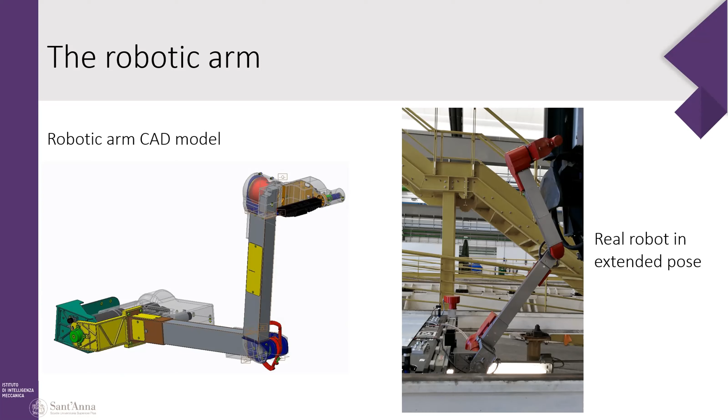The robotic arm has 5 degrees of freedom, with a serial kinematics. The first degree of freedom is a prismatic joint made by a linear guide that allows the robot to span from one side to the other side of the rail. The other 4 degrees of freedom are rotational joints.

Regarding the control system, it is located on the chassis of the mobile platform. As for sensors, we have 4 encoders on the wheels and a camera on the end effector.

This system can be used in 2 modalities. The faster one is a navigation modality in which the robotic arm is fully retracted, and we can scan by teleoperation from a remote operator, or in a semi-autonomous way when we fix some points of interest, and the robot can reach that point, take a picture or some pictures in that area, and then go ahead.

Or in inspection modality, in which the mobile platform is stopped and the robotic arm can be raised and teleoperated by the remote operator to reach more in detail the surface.

This is just a very quick overview of the system specs. We estimate an inspection time per train car of 15 minutes, with an overall weight of the system of 60 kilograms.

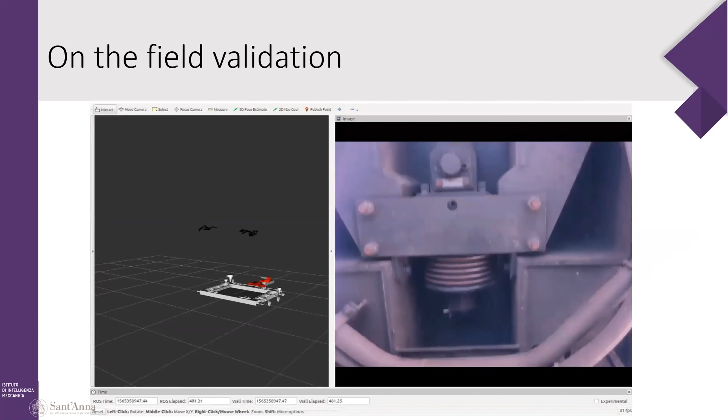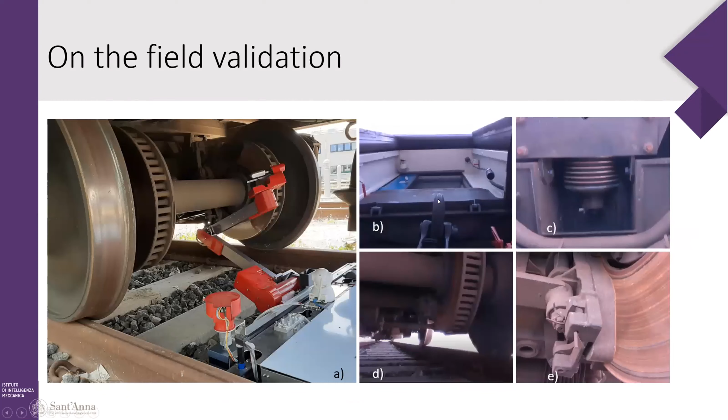This is an on-field validation made by an operator of the Trenitalia operator, who autonomously performed this task. He was able to monitor the state of the traction hook dampers, the presence of fixing items, and brake pads. These are the pictures taken of the interested part of the train.

The second platform we developed was for the safety inspection of railway. It is the same environment, but different because it was developed in partnership with Rete Ferroviaria Italiana, the main company that manages the railway infrastructures.

RFI usually carries out maintenance operations during the night. So there is a need to inspect the work site after the operation, or at the stop of the line, because a work tool or some operation residual can be left behind, which can result in a possible obstacle for trains. This means a critical safety task.

So we designed a robot to automate the inspection procedure in a versatile and affordable way. We propose this drone, designed for high-speed autonomous inspection on the line.

This is equipped with two lidars, laser sensors, one in the front and one on the lateral part. It records meaningful data related to profiles and volumes of the track, checks the clearance profile of the loading gauge, and detects frontal and lateral obstacles.

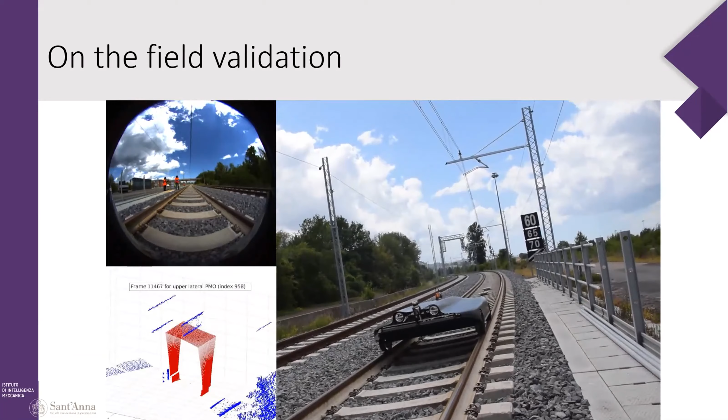This is an example of lateral obstacle detection. Behind the camera on the ground, there is a person that simulates an obstacle. In this moment, the robot stopped and came back to the obstacle, then generated an alert in order to allow the operators to study and detect the obstacle.

The same scene can be seen from another perspective. The obstacle in this case is a man, and the robot detects it thanks to the laser sensor, records the position where the obstacle was detected, and then comes back to analyze the obstacle.

So in conclusion, we developed two mobile robots for challenging environments, in this case railway environments: one for train undercarriage inspection and predictive-based maintenance, and a second one for safety inspection on railways. The use of mobile robots in railway can reduce economic loss by maximizing the use of train parts and reducing the downtime of the whole train, and it can improve the safety of railways and automate the inspection process after maintenance operations.

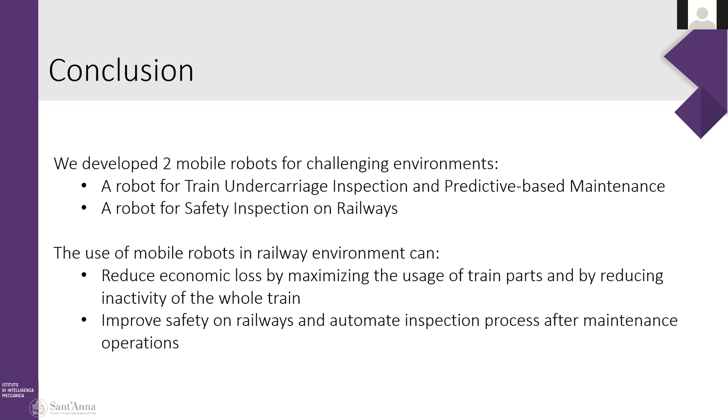And I think this is in agreement with the field and service robots as indicated in the very first presentation of this morning. Thank you everyone, and if you have questions, you can ask me.

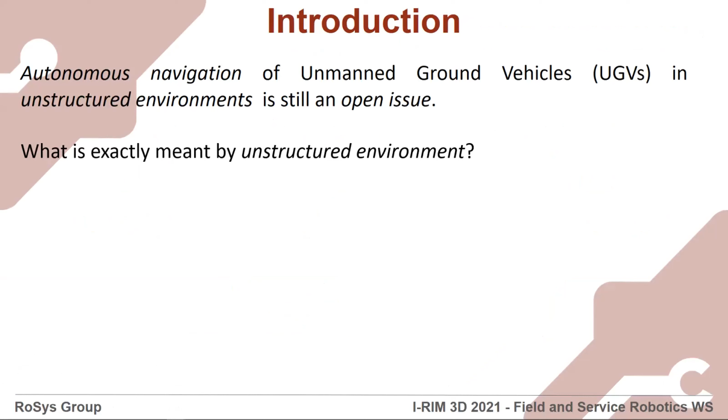But what is meant actually by unstructured environments? According to the Springer Handbook of Robotics, which is actually a definition more related to robotic manipulators, an unstructured environment is in general any environment which has not been previously modified in order to simplify the task of a robot.

So how can we translate this definition in the context of autonomous ground vehicles? It essentially means we have environments lacking helpful landmarks or clearly viable paths.

But what's more important is that this type of environment can find a lot of applications, ranging from search and rescue and disaster response, to agricultural robotics, up to planetary explorations. And as we can see, these are crucial scenarios as well as very challenging ones.

Learning-based methods can help us in providing some support in the perception of the environment, to support navigation in a context-aware mode. Here, by perception, we refer to the global block of inferring high-level data from the sensory data.

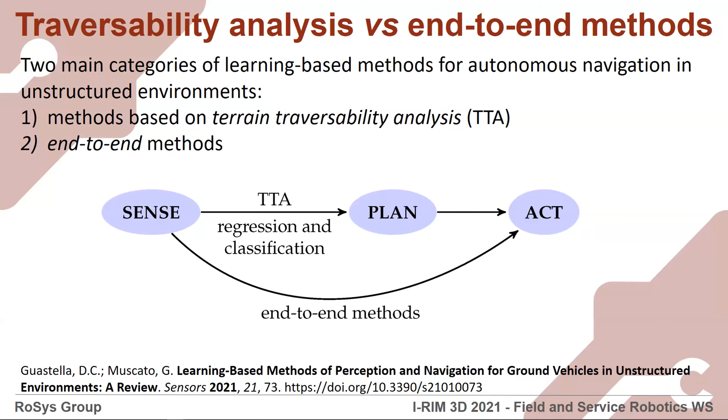End-to-end methods try to provide a direct mapping from the raw input sensory data, either exteroceptive or proprioceptive, directly into actions. So we could affirm that TTA implies a further processing step, which can be seen as a limitation, but somehow can help us during the debugging—during testing and development of our autonomous algorithms.

A further classification we can make, talking about autonomous navigation in unstructured environments through learning-based methods, and in particular TTA methods, is between regression methods, classification methods, and mixed regression and classification methods.

As in the machine learning jargon, regression methods essentially aim at inferring and deriving a traversal cost—a value encoding the difficulty of the field robot in traversing a specific area.

Classification methods, of course, aim at classifying the environment into classes with some navigation-relevant features—for example, classifying grass from rocks, from sand, and so on.

But nowadays there are also very common hybrids between regression and classification methods, which is one of the works we have done recently and I will show in the next few slides. Regarding this classification, we have recently published a review, which is reported at the bottom of the slide.

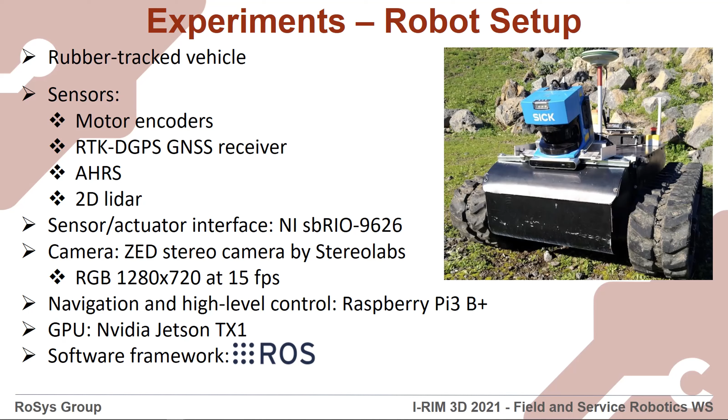To do our experiments, we used a tracked vehicle equipped with a stereoscopic camera, the ZED stereo camera by Stereolabs, motor encoders for wheel odometry, RTK differential GPS, attitude heading and reference systems, as well as a 2D LiDAR. For low-level control, we have an FPGA-based board, the National Instruments Single Board RIO. Most high-level functionalities run on a Raspberry Pi 3 Model B+, along with an NVIDIA Jetson TX1 GPU for the deep learning part. All of this software runs in ROS.